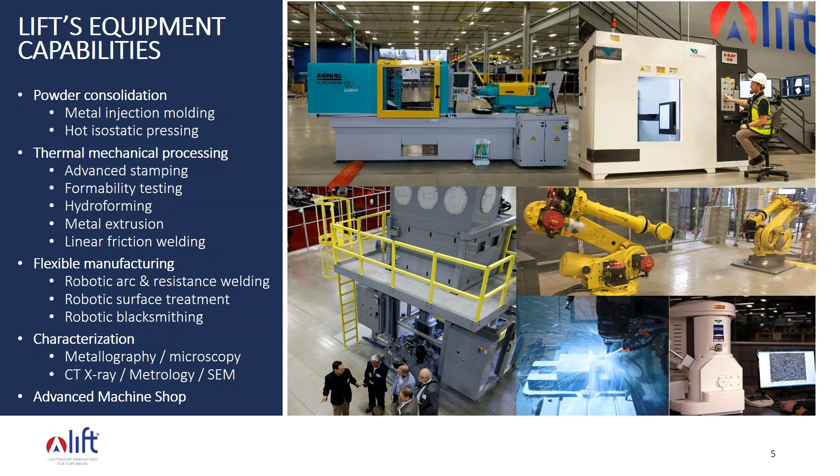That is going to come online here within the next month, we believe. Our friends at MTI down in South Bend, Indiana, have been working on this for a long time, and we are very excited about the capabilities that we'll have there with the linear friction welding.

We are also a leader in education workforce development. As people have heard, there is a tremendous skills gap in manufacturing and engineering. Not enough folks going into that as a career choice. So that is why that is one of our focus areas.

So we've made more than 40 investments that are replicable and scalable and sustainable around the country, engaging 150 education workforce partners and impacting nearly 200,000 teachers and students around the country.

We are in the process, again, here at our facility of building out the LIFT Learning Lab, which is a unique facility that will house training opportunities and certification opportunities and really just exposure opportunities to the world of advanced manufacturing for teachers and students that may just need exposure to the world of manufacturing, to teachers who can take some of what they learn back into the classroom, to incumbent workers who just need to be upskilled or earn some certifications. So we're looking forward to that coming online later on this year, hopefully in the first quarter.

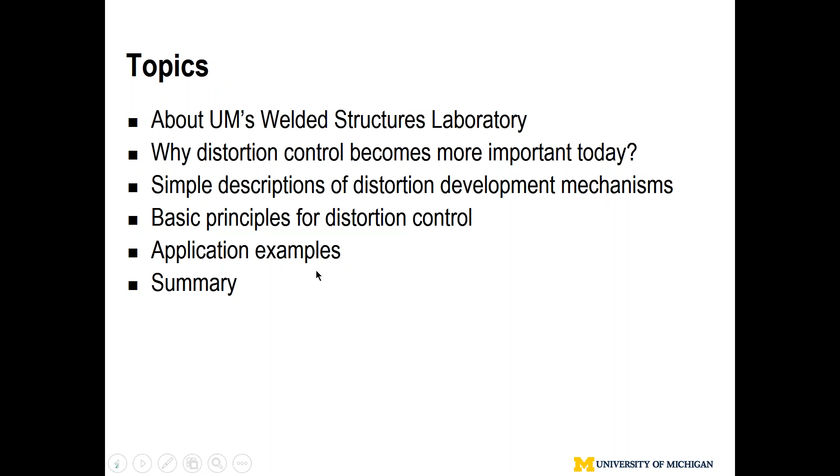So that leads into basic principles for distortion control - how, based on understanding of the mechanism, we can implement it for different applications, different structural forms. With that, I'll share with you some examples to demonstrate how those principles can be used, along with some concluding remarks.

Just quickly, over the years, I think some of you in the audience have worked with me in the past, so some of you may have seen this. This is essentially still what my group does at the University of Michigan, and I did the same thing at Battelle, so over the last 20 years. This chart hasn't been updated properly, but it at least gives you a sense of what my group does in terms of research and education. What I'm trying to illustrate is how we look at how material gets processed, how heat and material interact to give us the quality definitions we typically observe. Along with that, we look at the residual stress distortion, look at the structural level, what type of distortion mechanism gets introduced, and how to control it.

The bottom part looks at how to define quality, some of the unique simulation methods - some of them analytical, some of them computational. I think some of you are probably familiar with some of the terminology, like Verity. It's already been in the commercial market since 2006, and some of these continue to be research tools my researchers or students continue to enhance, like looking at microstructure evolution and how they contribute to defects.

So the red color indicates some of the unique predictive tools we developed over the years. The illustrations are taken from some of the ongoing or past projects, so they are not cartoons, they are actual images taken from actual project reports.

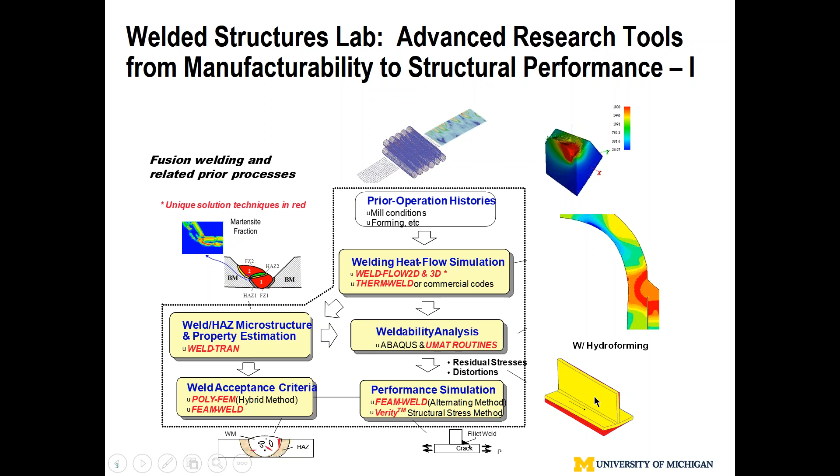As I said earlier, I'm not going to dive into the detail. This is just showing the background. We've had the opportunity to look into all aspects of welding and joining, how they interact with the material, how they interact with the structure. So today we'll be focused upon distortions, okay?

The previous chart deals with fusion processes, and this chart deals with solid state processes. Again, we look at how nuggets get formed, how induction heating interacts with the welding process and with the material. We introduced and built upon commercial code, ANSYS and Abaqus, and developed a driver system so we can do electrical, thermal, mechanically incrementally coupled processes. Based on that analysis and those findings, we're able to come out with a simplified description of the dynamics of the process, and come up with engineering applications.

Again, the red color indicates implementations, how to work with the commercial code, and then in problem solving, and also coming up with simple analytical arguments for product-related applications.

This chart covers all solid-state processes, obviously friction stir, spot welding, diffusion bonding, and other joining processes. I'm not trying to emphasize that you have to do extensive computation in order to solve a problem, but this is only trying to illustrate that when needed, we can dive in deeper to understand the underlying mechanics, and then extrapolate from that to come up with simpler, effective solutions.

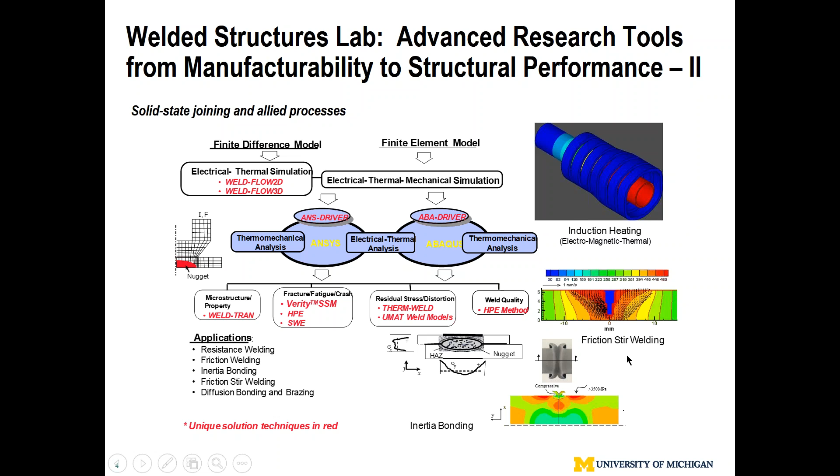These two charts highlight what my group, the researchers and PhD students, has been and continues to be working on. So with that, let's come back to the main topic.

So why are we interested in distortions? Because today we're dealing with lightweight structures and high strength material, and what happens is the material plate can become inherently unstable. Even though most of the distortions occur at the welding stage, welding is actually not the only culprit, because when you deal with thin gauge material, other processes become important.

Here's an example already in the literature from one of our early projects. I think a couple of people online are familiar with this chart. If I consider two flat plates coming in, they come in flat, but it's slightly different in mill condition. We normally ask for fairness or flatness, but we don't ask what it takes to get that flatness.

So then you go through simultaneous slitting. What happens on the left-hand side is you have buckling distortion immediately after slitting. Slitting essentially doesn't produce any heat, doesn't produce any significant plastic deformation. Yet an identical slitting process on the upper right shows the plate essentially flat.

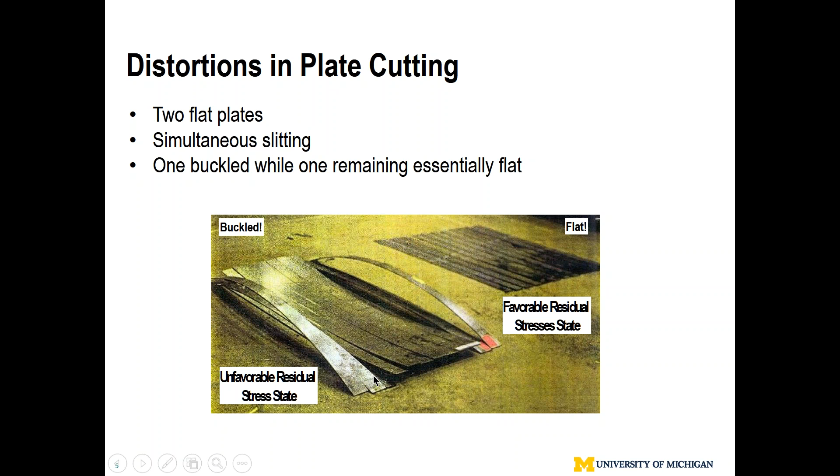What that says is, as we get into structural lightweighting, we have to worry about, when we specify sheet or purchasing sheet or plates, what process went into it, so that we don't develop the situation on the left-hand side. This is just an illustration of the situations we run into in practice.

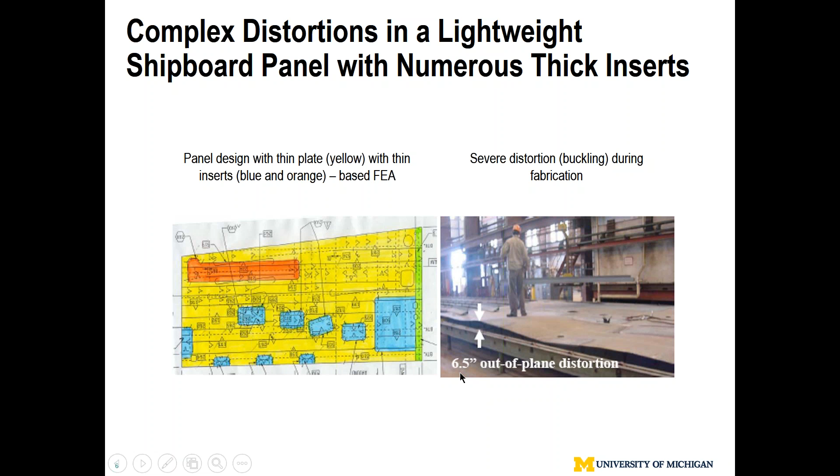Another one, I think again in the automotive industry—a lot of you are from automotive companies or suppliers—friction stir welding has been well accepted and considered as a new solid state joining process with low temperature, tending to give good dimensional accuracy. In literature, friction stir welding is considered a low stress, non-distortion technique because you avoid heavy clamping, as the structure is inherently structurally stable. After welding, they tend to stay in shape. So here's this from Marshall Space Flight Center as part of the Orion rocket program.

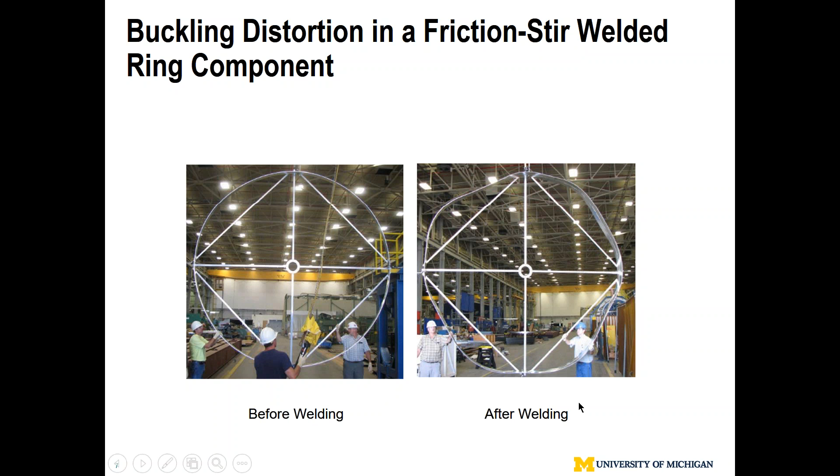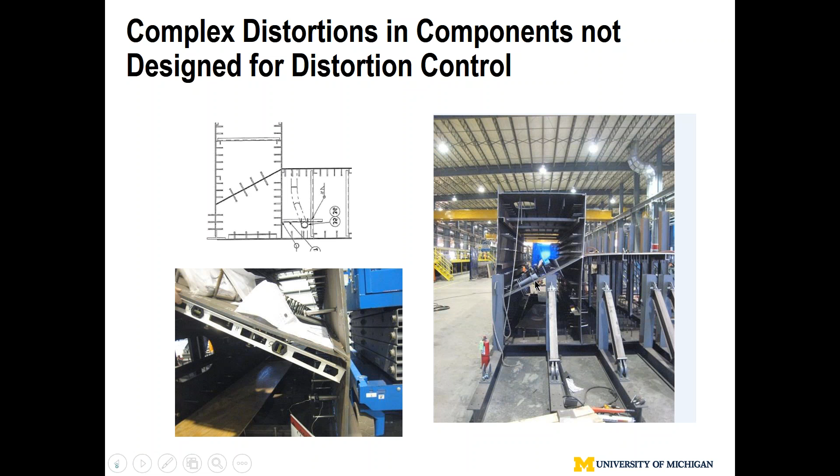We'll talk about how to fix this problem during production. Obviously this one cannot be fixed, but future products can be. We had to introduce interim or temporary braces in order to maintain shape. Once you're able to maintain shape and structural rigidity, you can manage the sequence. At this stage there's nothing you can do, so this is wasted. Anyway, with that in mind, so far we've talked about dimensional accuracy and dimensional variation just for modular assembly, because in modern production with modular design and modular assembly, if a thing doesn't fit, you want to be able to put them together.

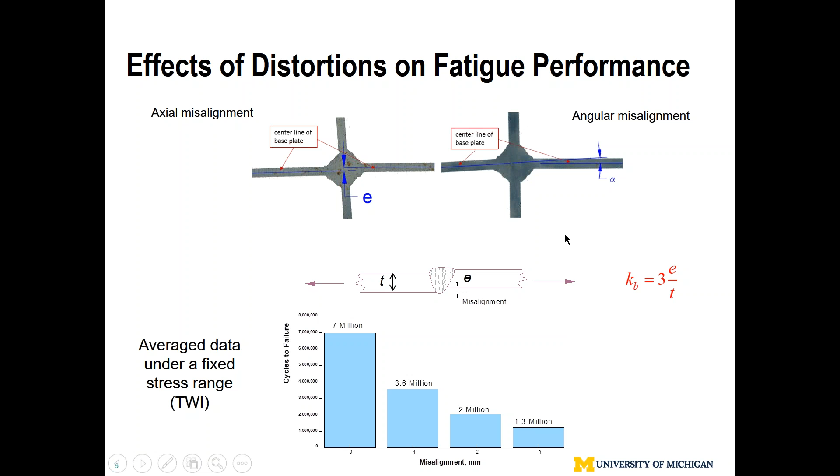But actually, if you derive the stress concentration factor, that's 3 times E over T. In that case, this factor of 3 can significantly decrease fatigue life, and that can be observed in the Welding Institute test in the UK. They considered visually almost no distortion for 100 plus or minus 100 megapascal loading. You get 7 million life cycles versus 3.6, 2, and 1.3—so you're getting close to an order of magnitude once E over T is about 30%. That means there's an additional incentive to control distortion, to reduce poor fit-up during assembly, because distortion can have a tremendous impact on the product's life.

So with that in mind, the most recent trend, I think CAFE standards are driving this message in terms of lightweighting, and one of the most effective ways to achieve lightweight is multi-material structure. I'm using this DOE program as an example. If you simply introduce high-strength steel, the weight reduction is limited to about 10%. But when you introduce multi-material, that could be composite, aluminum, and high-strength steel, depending on where they're going to go, you should use the right material at the right place.

Direct joining is much more desirable than mechanical fastening or using adhesive. But once you use direct joining, you introduce plastic deformation and heat, which causes distortion. That makes it more challenging when we talk about multi-material. I was personally involved in the ONR T-Craft project, where multi-material was involved internally, and that can become very challenging.

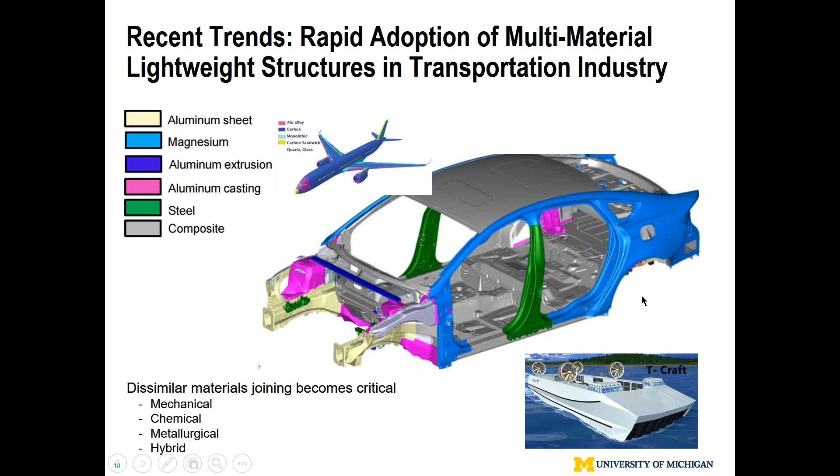So with that in mind, this tries to set up the scene for why we should worry about distortion more so today than before. In a nutshell, as a way to achieve lightweighting, we've got to decrease thickness. As we've seen from the friction stir welding example and the shipboard buckling example, the distortion resistance, in terms of stress, is proportional to T squared.

That's why in the shipbuilding industry, and also in armored vehicles, when you talk about lightweight, let's use a simple number: if originally you used 10 millimeter thickness and now that's reduced to 5 millimeters, you're talking about a factor of 4 reduction in distortion buckling resistance. That's why shipyards in the past, dealing with 10 millimeters, didn't see much buckling distortion. All of a sudden, starting about 15 years ago, you see all kinds of distortion issues.

So that's one aspect. Another aspect is high-strength steel. Obviously you've got to use a thinner gauge when you introduce high-strength steel. In the meantime, the residual stress is pretty much proportional to the yield strength of the material. Using shipbuilding terminology, this is essentially A36 steel at 36 KSI versus 80 KSI. The residual stress produced, causing buckling distortion, is about twice as much.

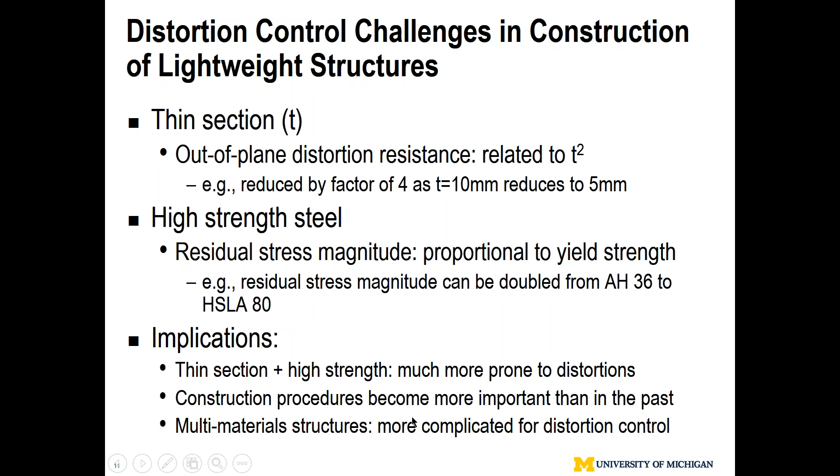I don't want to get into too much detail here, but I'll use a simple analogy to drive through a point about what causes distortion, why, and how we can derive a methodology for effectively controlling it.

So here's what I use in my class at the University of Michigan. If I have a heavy window frame with this support, as an integral part of the frame, the distortion is produced in step 1 by heating this part, such as during thermal processing — that could be thermal forming, laser forming, or welding. That means I'm going to heat up this area by delta T. Since the frame is heavy, we can consider it a bar that's rigidly or fully restrained.

If some of you have trouble visualizing that, we can use the analogy of a fit-up. As soon as I apply heat, this bar, if free, would expand by delta L. This delta L equals alpha times delta T multiplied by L0 — thermal expansion coefficient times original length times delta T. It's the same thing as applying delta T in a fixed frame, or having a fit-up bar that's a little too long by delta L. Since the side area is so rigid, it cannot expand — all the expansion will be absorbed locally by this amount, delta L, by the frame. That's the simple analogy.

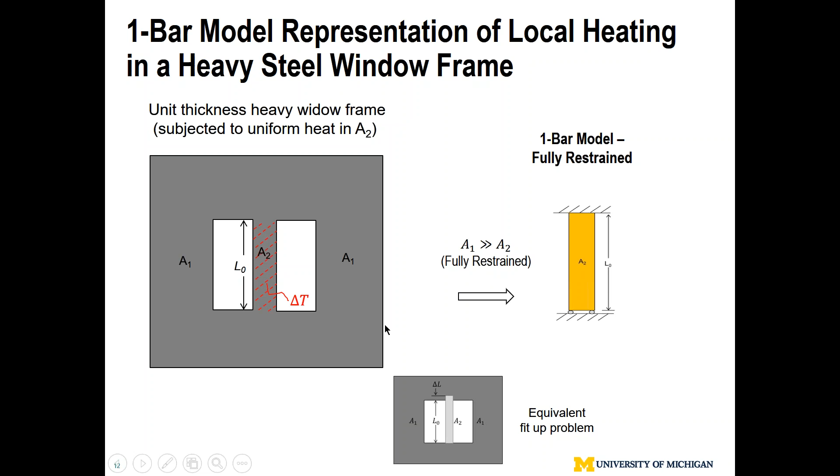Let's go through some more details to see what is going on. I'm considering that bar model fully restrained because the frame is heavy. In actuality, when we do a welding operation, this condition is pretty close to reality. We're going to justify that shortly. So in that case, I apply delta T for this fully restrained bar.

I apply delta T because alpha delta T is proportional. If I assume L0 is unity, then strain becomes deformation. So as I heat up, the strain builds up in compression proportionally. That means the blue color will be alpha multiplied by the red color.

Assuming I reach a temperature regime where alpha delta T is less than epsilon Y—since this is compression, that means less than minus epsilon Y—and then I cool down, nothing happened. I did nothing to the bar.

In manufacturing, anything dealing with temperature, we actually want to change—we go to higher temperature. Then the question is how high can we go before there's a potentially permanent effect. Since this value is alpha delta T, a compression because it's fully restrained, I equate alpha delta T equals epsilon Y. That's the elastic deformation capacity of the material.

So that's defined on the stress strain curve, and then I can find the critical condition. Plugging in mild steel values, this is roughly consistent with the material handbook: 30 KSI mild steel, thermal expansion coefficient, and 30 million PSI Young's modulus. What this says is I end up with 154 degrees, even well below our cooking temperature, water's boiling temperature.

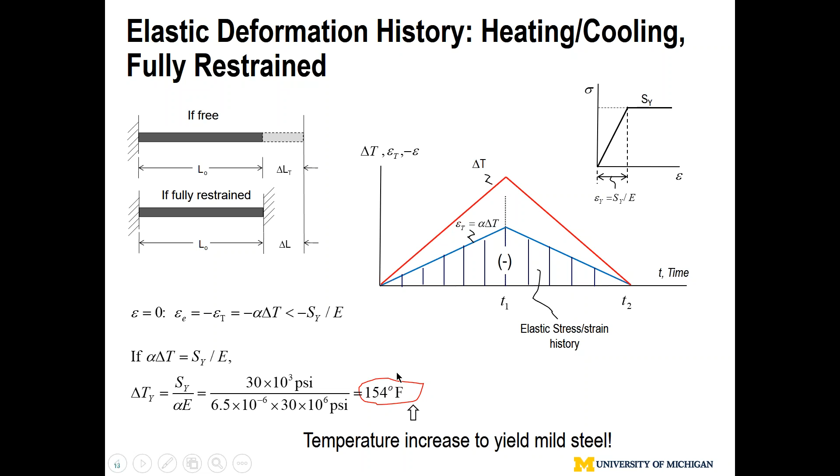In that case, the residual stress will be tensile yield magnitude. That's the key message. A moment ago, we talked about 154, so now if you followed me, 2 times 154 will be 308.

I tend to get inquiries all the time when someone does a residual stress measurement and gets a very high residual stress beyond yield. Actually, that's not a big deal. As long as the local heating, what we call localized heating, exceeds 2 times delta Ty, the residual stress will always be equal to or larger than the material yield strength.

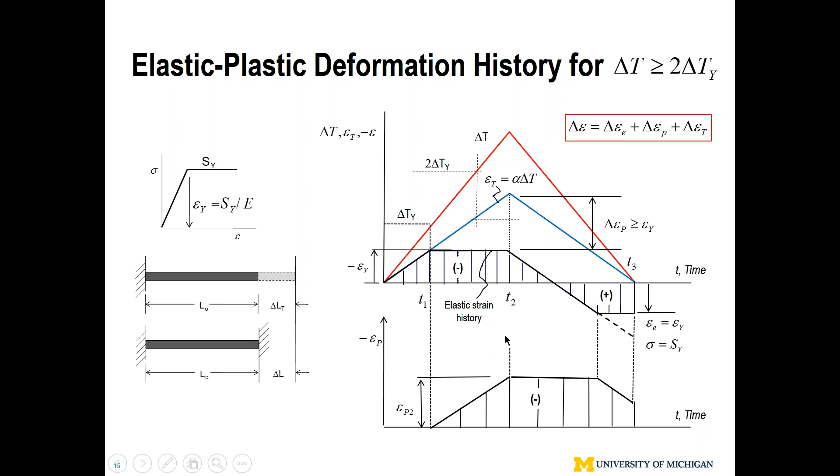Obviously, if you have hardening, that will introduce higher than yield magnitude residual stresses in terms of peak value. So again, that's the message. Then the question is, how does this relate to practice?

I'm using a fully restrained 1-bar model. If I consider a big plate, I'm going to heat up a middle area, make it symmetric, and then we can solve a 3-bar model. Without getting into detail, you just have to trust me. The question is what it takes to reach delta Ty, what will delta Ty be, and how that compares with the fully restrained condition.

Within this system, if the two side bars have an area 2 times the middle heated area, I get a critical temperature delta Ty of 193. As that size reaches 5 times A2, meaning the side area is larger than 5 times the middle bar, you get 169, 157. So in any practical application, I'd say 90% of the time you satisfy the 154 for a low carbon steel, meaning roughly 308.

Just for argument's purpose, this is very easy to achieve. That's why NASA's friction stir welded ring always has residual stress above yield along the welding direction, triggering buckling. The residual stress within that area will be tensile, and on the sides they balance it by equilibrium, so total force equals zero, total moment equals zero.

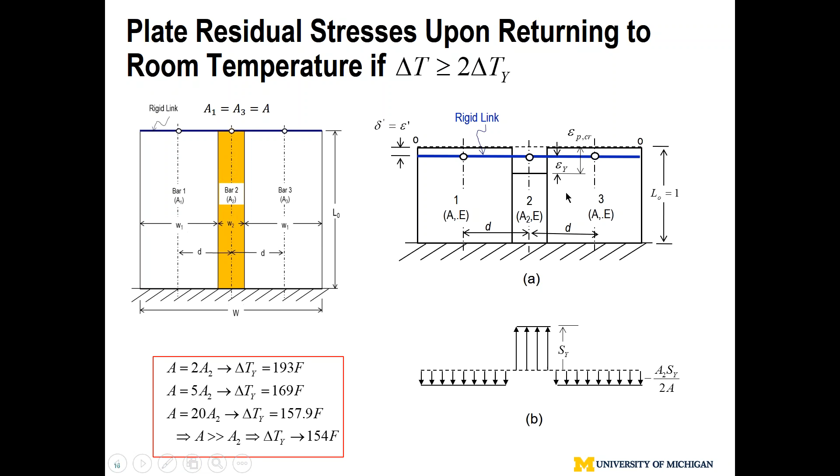What is the heated area? When we do welding, we have molten material, and then material beyond the weld zone gets heated. This is W2 or A2, representing the plastic deformation zone. This is aluminum alloy about 1/4 inch thick, simulating that process using a computer model. The plastic zone far exceeds the width of the weld zone.

The key message here is we worry about shrinkage and distortion, not just the weld metal. It's actually the metal surrounding the weld zone, the plastic zone, that is the shrinkage zone. That's simulated by the finite element model. WP is the width of the plastic zone multiplied by thickness, giving the plastic zone area AP or A2. If unit thickness, we call it WP.

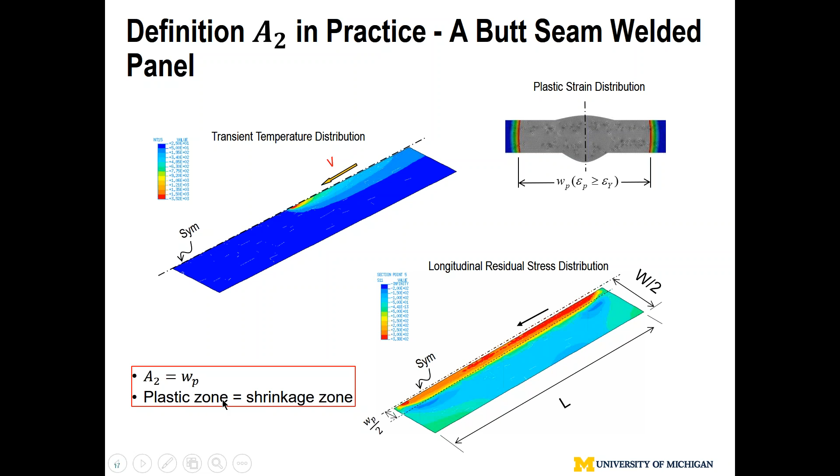The reason I'm spending more time on the plastic zone is that it's the fundamental quantity impacting distortion. With that in mind, this is a NASA example related to Space Shuttle Station construction, the 2195 tank. I'm going to bypass that.

If the plastic zone is a fundamental quantity we can work with to develop a distortion control strategy, that's why high heat input versus low heat input matters, and why low heat input is beneficial. With high heat input, weld size the same, fillet weld, double-sided fillet, the plastic zone is marked here, anything other than dark blue. With low heat input, the plastic zone is half of the high heat input. As a weld engineer, we want low heat input; laser is the best, and this provides more mechanics-based justification.

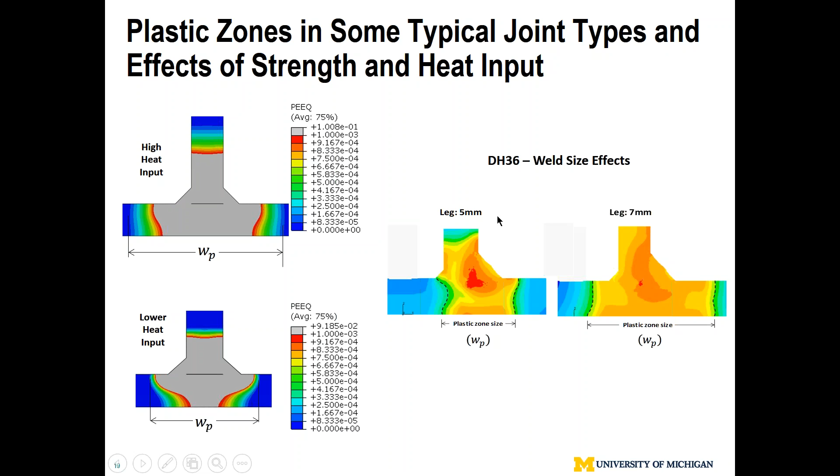In the meantime, why do we want to reduce weld size? Weld size increases from 5 millimeters to 7 millimeters, for shipbuilding applications. You can see the plastic zone width WP gets increased. Essentially, the total area is doubled by increasing the fillet weld leg size from 5 millimeters to 7 millimeters.

This concept was used in the 1950s by the Russians, but not many people do that anymore. I think they did some classical work in the 50s, so I managed to find the original reference on how to justify why multiple passes is better than one pass.

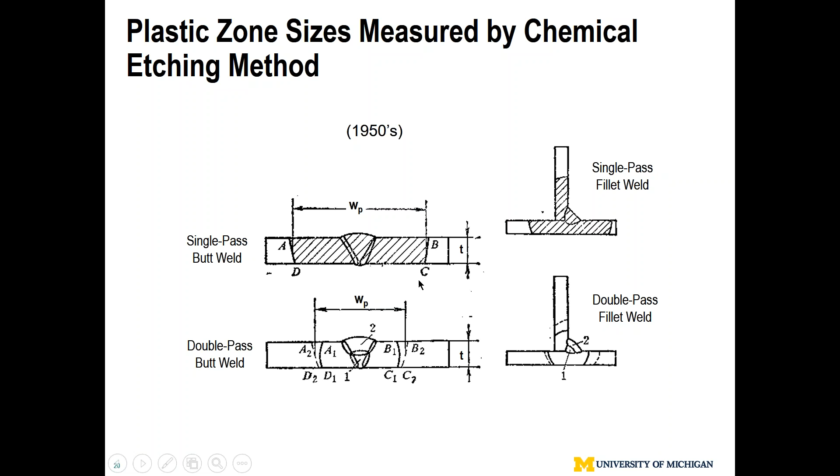So the plastic zone, you can use computer simulation or chemical etching - metallurgists know how to do that because plastic deformation is sensitive to certain chemicals. Once the plastic zone is known, distortion prediction is easy. You don't have to do full-blown computational analysis. We call this the shrinkage force or shrinkage strain-based method.

As long as you know the plastic zone size for a given manufacturing process, once delta T already exceeds 2 times delta Ty, that zone is defined. Within that zone, the shrinkage force will be SY, the yield strength of material, multiplied by the area, giving the shrinkage force.

Once I know the shrinkage force, I can go to a structural mechanics solution. For beam bending problems, I can calculate average longitudinal shrinkage, rotation of the beam, and deflection using structural mechanics principles.

If it's a shell plate structure, you use shell plate theory. If you don't have an analytical solution available, you plug in the shrinkage force or shrinkage strain using the finite element model. So the key thing is FP, epsilon y. FP relates to AP, E, epsilon y is the material property.

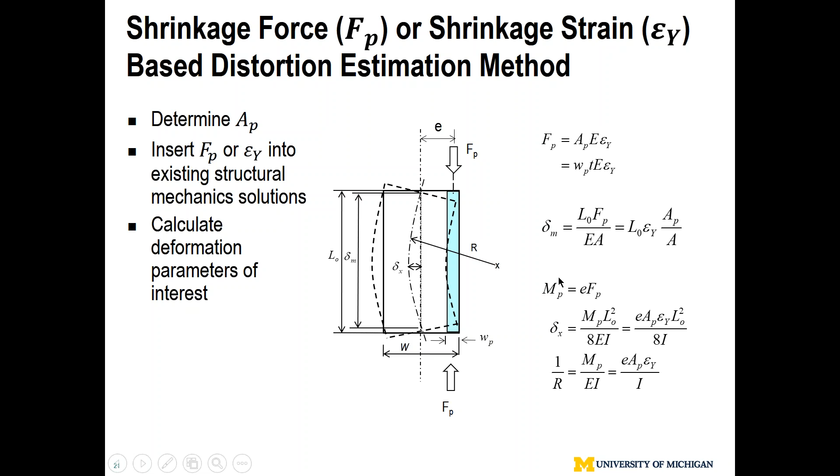So that's the key. Obviously we assume the material has no hardening. If you're more comfortable taking what we call flow stress, that can be done easily, but conceptually it's much easier to argue using SY to make a point.

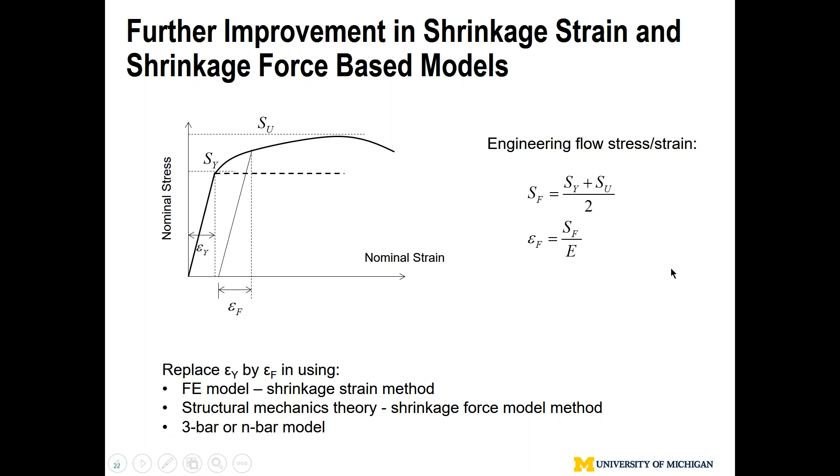With that in mind, let me quickly show you some examples of what the implications are for distortion control. We introduce the plastic zone, which we call the shrinkage zone. Within that shrinkage zone, the elastic strain is at epsilon y magnitude.

As a result, the residual stress will be at SY magnitude along the weld. Those strains get used in literature under different names - I have no idea why - Eigen strain, inherent strain, incompatible strain. I call it shrinkage strain. So what is the shrinkage strain magnitude?

As long as you achieve the 2 times delta Ty criteria, that's epsilon y. In terms of stress, that will be SY. They make it a little mysterious, but in my terms, it's just shrinkage strain once you reach the critical temperature delta T.

Now, up to this point, how are we going to control distortion? Let's control the shrinkage zone. You want to make the shrinkage zone, the plastic zone, as small as possible. You want to make the shape of the plastic zone as symmetric as possible. And here's the more difficult one: the position of the plastic zone, the neutral axis of the shrinkage zone, has to be as close as possible to the neutral axis of the component at that moment during assembly.

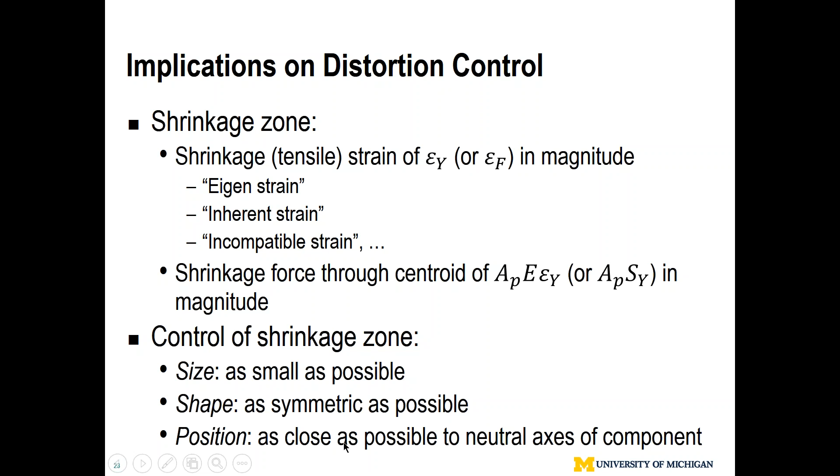So very easy: shape, size, position. Position is a design problem - the design engineer needs to be aware of the shrinkage phenomena. Designers should try to put the weld at the neutral axis, at a symmetric position as much as possible, to make the weld seam as symmetric as possible.

Let me clarify this with a few examples. In industry or academia, people tend to make confusing statements. When we say shrinkage versus distortion, they are not the same thing. Shrinkage mode has a mechanics connotation indicating a fundamental phenomenon that can be illustrated by a simple mechanics model. Distortion is a manifestation of the shrinkage phenomena in a structural context.

This is loosely called distortion types, really describing geometry or out-of-tolerance geometry. Shrinkage mode is a simple mechanics argument. So let's use a plate, say with a butt seam weld - only 2 shrinkages, delta L, delta W, just that simple.

If everything is symmetric, meaning the weld position is symmetry, left and right same area, as long as the penetration, the fusion, the plastic zone is symmetric with respect to the weld center, you only have shrinkage available for a thin plate. In that case, you are not talking about distortion, but simple shrinkage, and that shrinkage is very minimal.

But the problem is, when we talk about distortion, that means the shrinkage no longer has symmetry to work with. In that case we can have out-of-plane distortion, rotation - that's angular distortion, longitudinal bow, buckling, and in-plane rotation. If the seam is located away from the symmetry, you get in-plane rotation. If a big blob of butt seam weld gets deposited and the dashed line is not vertical, not symmetric to the neutral axis of the mid plate thickness, you have angular distortion. Into the paper, this will develop longitudinal bow.

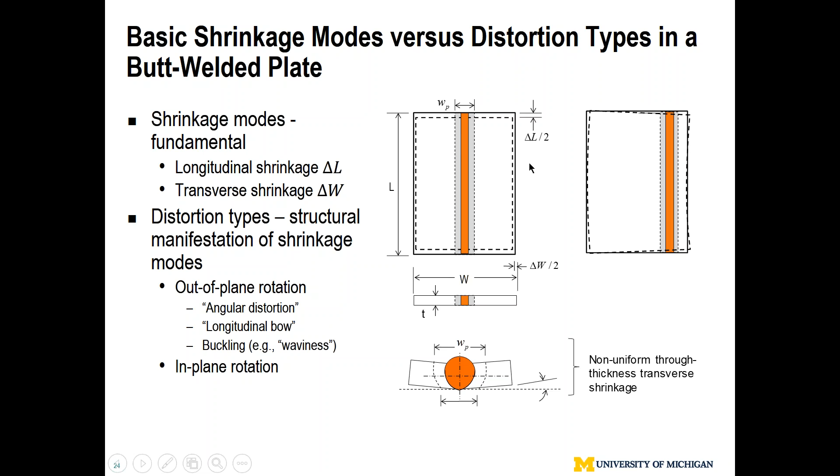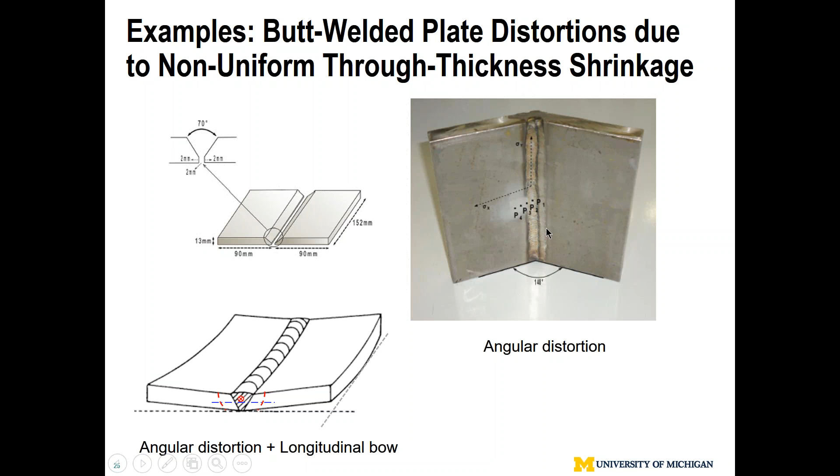So if I look at a single V joint, for illustration purpose, the red line here is the plastic zone shape. Because it's not symmetric to the neutral axis of the plate, you have angular distortion. And also the centroid of the shrinkage zone, the plastic zone, is above the neutral axis, so you get this longitudinal bow. This is the actual experiment done in France to support the international round-robin study.

A few examples - say why one-pass weld is not desirable. Obviously for automotive application you want one pass because of high productivity, but sometimes you may have to compromise. It depends on what is the priority. So one pass versus two pass versus three pass - three pass will be the best, two pass better, one pass the worst.

That's because the plastic zone is symmetric. Some of you may ask, how about I just deposit pass one? That's unsymmetric - that's how clamping comes into work. So that's the situation.

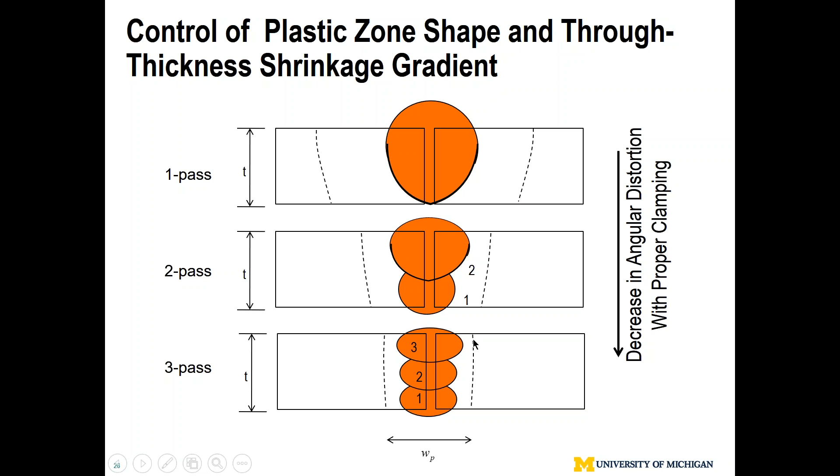In that case, you use clamping to provide restraint to maintain control, because you don't have symmetry you need a fixture to control things, which we're going to get into later. Once it's done and the plastic zone is symmetric, you can unclamp it, take it out from the fixture, and you have stability. So again, they don't have to be perpendicular - the only thing we require, like a double V, is symmetry with respect to the neutral axis of the mid thickness.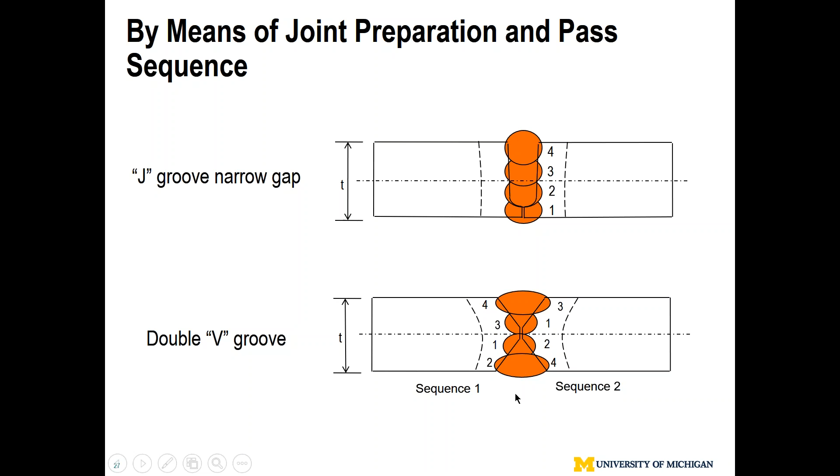So that means double V works better, but you need clamping. If I use clamping, you don't need to do the sequence 1, 2, 3, 4 - that's not necessary. I can do 1, 2, 3, 4, or any other scenario, as long as I have a clamping system to keep things in place.

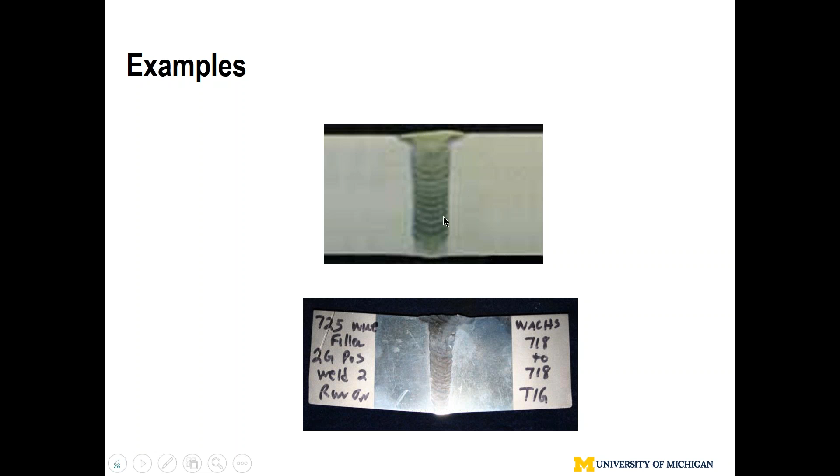This is one narrow groove weld from a major utility company for pressure vessel fabrication. You can see we don't need to do measurement - you know this because the plastic zone is roughly proportional to the fusion zone, so they give you very severe angular distortion. This is a narrow gap with good clamping after welding, and you can see virtually no distortion, right?

So anyway, just as a summary - I already repeated this but let me elaborate a few more things. The control of the plastic zone or shrinkage zone in terms of position, size, and shape is very important. Again, as a weld engineer, we need to inform the designer that positioning of the weld is a design problem - that means you want to maintain symmetry.

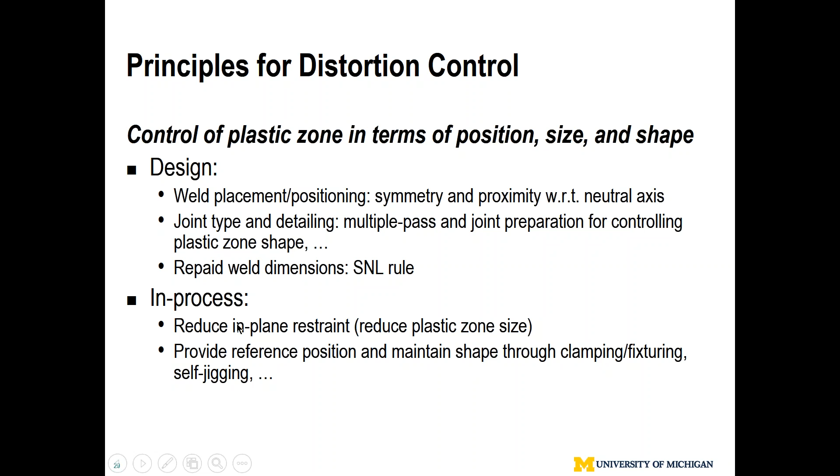Once you have symmetry, you want to be as close to the neutral axis as possible, among other things. I won't get into detail on that. In the process, I already talked about clamping, and I'm going to do some illustration, so I'll bypass a few things.

For fillet weld, convention in some industries uses size as a measure of fillet weld because it's something measurable from outside. We don't count penetration in fillet seam weld. From a distortion point of view, this obviously isn't good because you want to make sure it comes close to the neutral axis. With a little bevel, you get improved distortion control.

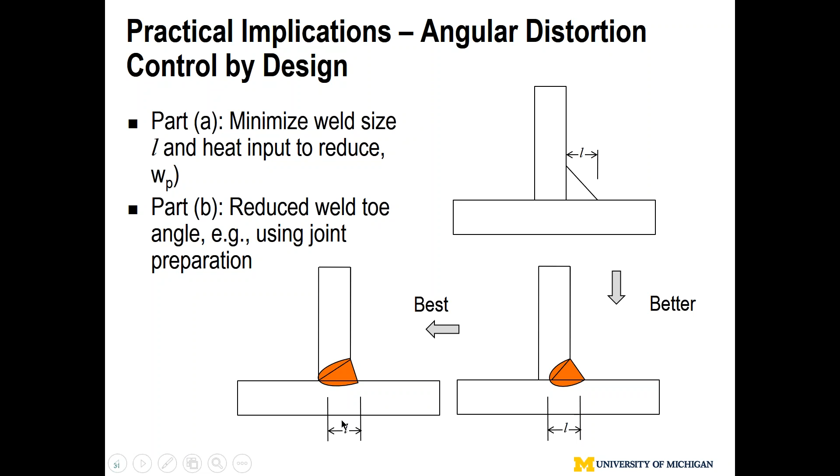If I do a full bevel, you get the same leg size equivalent to regulation, satisfying safety criteria like offshore structure regulations, but staying close to the neutral axis. A better approach today is hybrid laser welding, which achieves that with a minimum leg size. Actually, for this particular case, you don't need any leg size at all. But those are some examples.

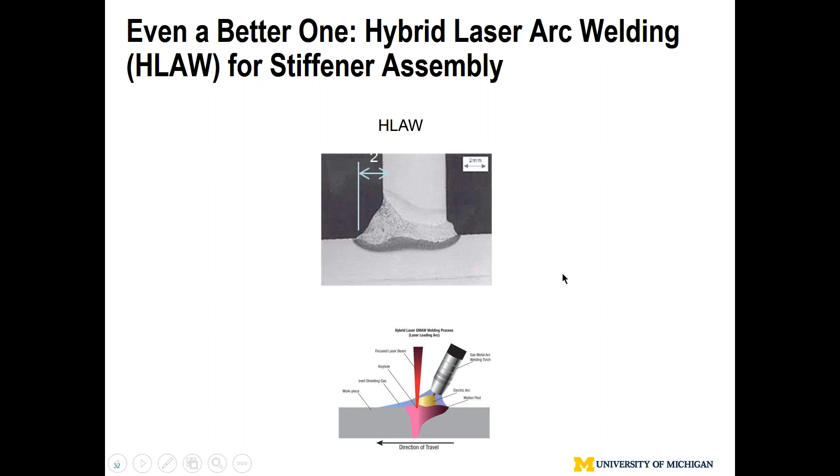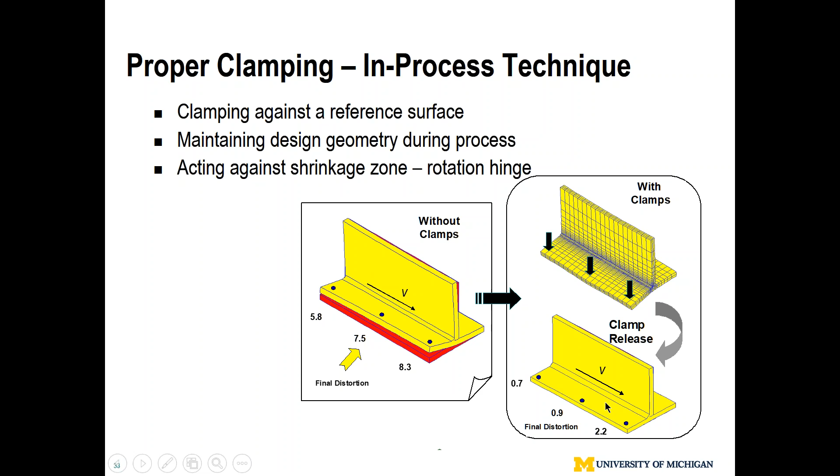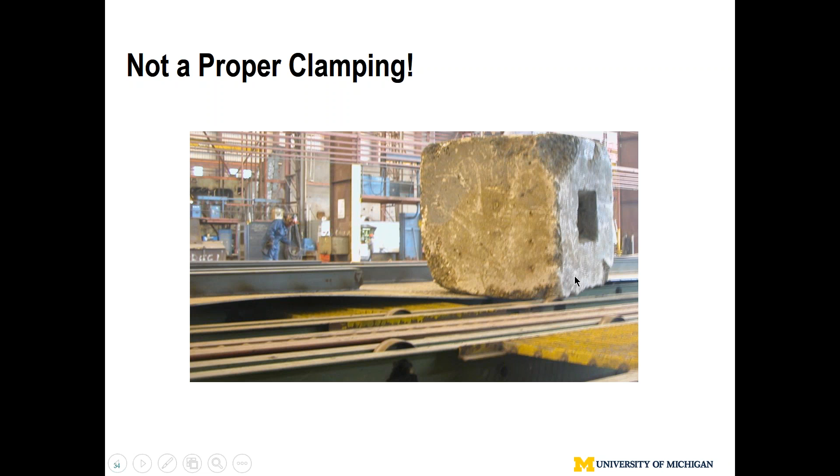Clamping is important. Just clamping anywhere isn't enough - it has to be clamped at the right location. This example shows, without clamping versus with clamping, how much improvement you get. But when I work with industry, people tell me they're using clamping, yet obviously it doesn't follow any real principle, and this happens on a daily basis across different industries. I want to use this example to give you a sense that clamping sounds so non-technical, but in reality it's a very technical term if you want to do it right.

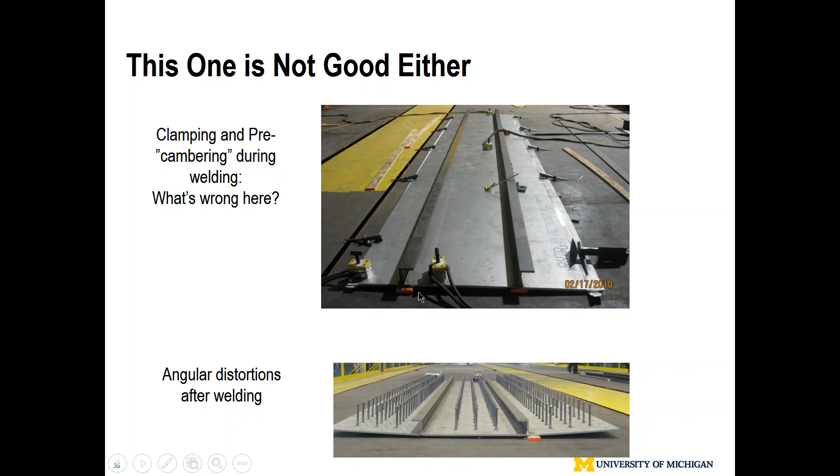That means the clamping wasn't in the right location, too far away from the action zone. What is the action zone? It's the plastic zone, a couple widths of the weld width in that regime. That means you have to go in and clamp that area. Obviously that's a little difficult, but to illustrate, for this particular stiffened panel, the plastic zone is in this neighborhood, about a couple times the fillet size.

As long as I clamp this regime, that would be most desirable. But if you're too close, you'll interfere with the welding. So the question is, how far away can I clamp without interfering with welding? This research involved some quick calculations, and we found we can do 5 inch spacing and still hold this area.

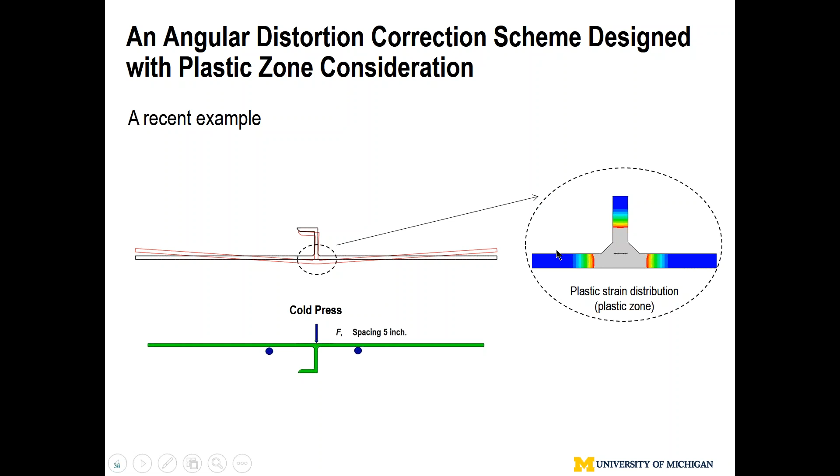The reason you want to clamp close - look at the red color, this is a computer model. This part is just like when you open a door, there's a plastic hinge. That hinge serves as the rotation point. The rest is rigid body motion, and the action is all located in this yellow region. That means you want to clamp as close as possible, not in the yellow region, but in the gray area - as close as you can.

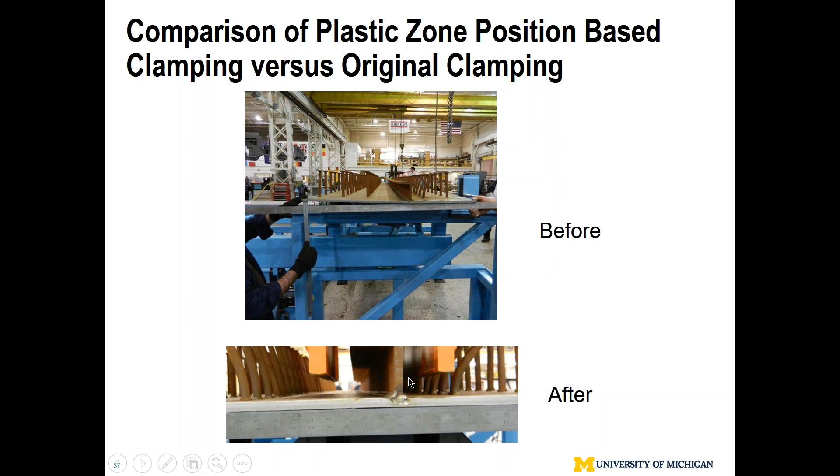This company got the idea and immediately implemented it, comparing with the reference, and then set up clamping about 5 to 6 inches apart. You can see virtually no angular distortion.

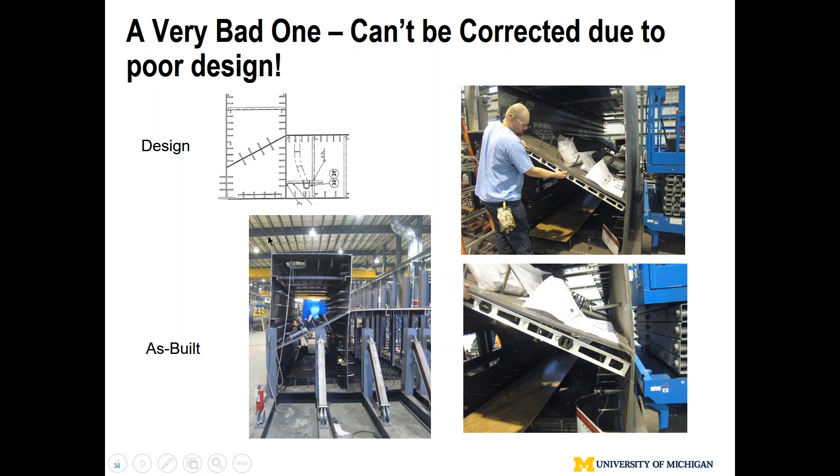Quickly, just a few more minutes - coming back to this picture, now I think I can elaborate. The reason this distortion cannot be fixed is lack of torsional rigidity in this direction. It doesn't matter what welding sequence or fixture you use - you're not going to be able to fix it. It will always have this distortion. So what do we do?

We have to implement temporary support. Look at those angles - essentially triangles that give you shape rigidity. Because of poor design, you temporarily introduce those angle irons every 10 inches - for this particular case, stainless steel - to provide support so you can maintain the shape. Once you have shape and rigidity stability, then you can manage the sequence.

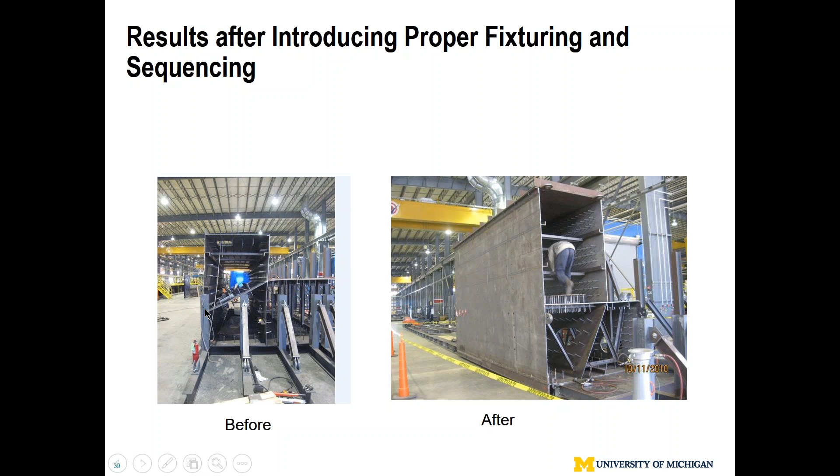Without doing any measurement, this is a similar component, but rotated. So left to right, you can draw the observation - that's much better, a significant improvement. Actually, this one on the right doesn't require any corrections. The left-hand side was wasted. So anyway, I exceeded time a little bit because we struggled when setting up the webinar.

This will be my takeaway message. Again, I think it's a very simple argument.

This condition is pretty easy to achieve, doesn't matter if it's friction stir welding or arc welding. You achieve it, and that means longitudinal stress, the peak value is going to be yield magnitude. Depends on hardening behavior, you can exceed yield, so that's not surprising. Don't get too excited.

The question is how to mitigate that effect. You're going to have high residual stresses as long as this condition is satisfied. In that case, within the plastic zone, we call it the shrinkage zone, and that zone is causing all the trouble we're talking about, whether small or large, in different industries.

So here's the key message: the most effective control of distortion is in-process, because you don't have to rework as long as you have the right procedure. I've already illustrated this through various examples. You've got to use a fixture if you don't have good symmetry. Even if you have symmetry, you can use multiple welding tools, but the fixturing has to be properly applied.